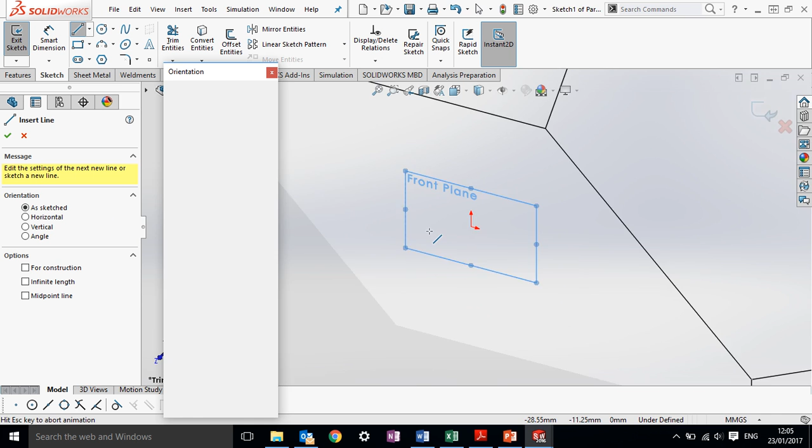So in this video we're going to build a metal frame for our brackets from previous videos and our box shelf to fit upon. So for more complex parts you can create a 3D sketch, but for what we're doing today a 2D sketch will suffice. So I'm going to be drawing this on the front plane, and I am going to basically draw out the frame that I want.

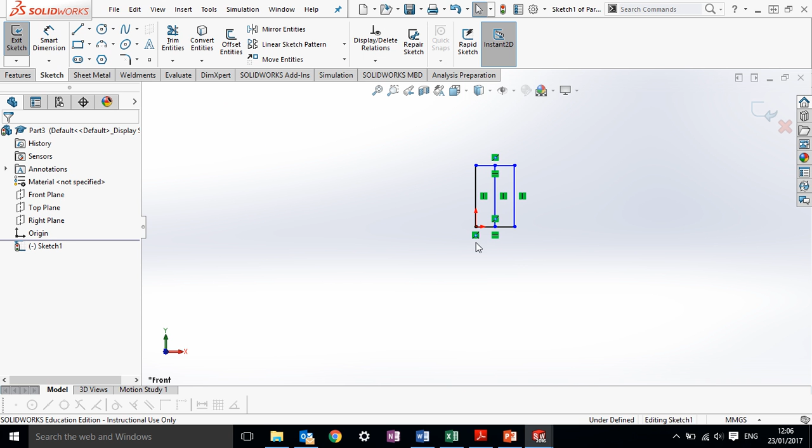It's important to remember that the center of this frame is what's important, or the center lines rather. So if I create maybe something a bit like this, and, sorry, that should be fine. Smart dimension. So the distance that I want between these would probably be about the 300 mark. That gives us enough room for the box shelf to fit on comfortably.

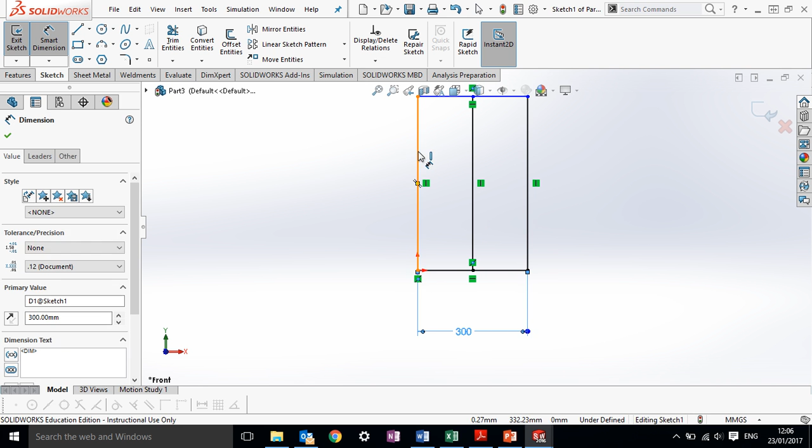So 300 millimeters, and this is right down the middle, so that automatically constrains. And the height doesn't matter too much. I'm going to set it to 500. Okay, so that's it. Get away. I don't care.

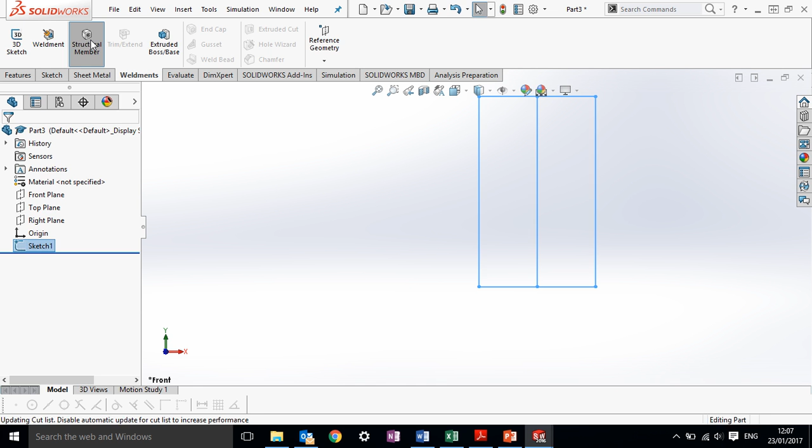Okay, so from there I can use the Weldments tab, if I press the blue arrow there, for a structural member. So I can then choose what type of material I want. So you've got inches and ISO. So inches is the material there is in stock of inches, and ISO is millimeters. So it's up to you which one you want to use there. Inches are still very much used in sheet metal and stock metal parts, so whichever you want to use.

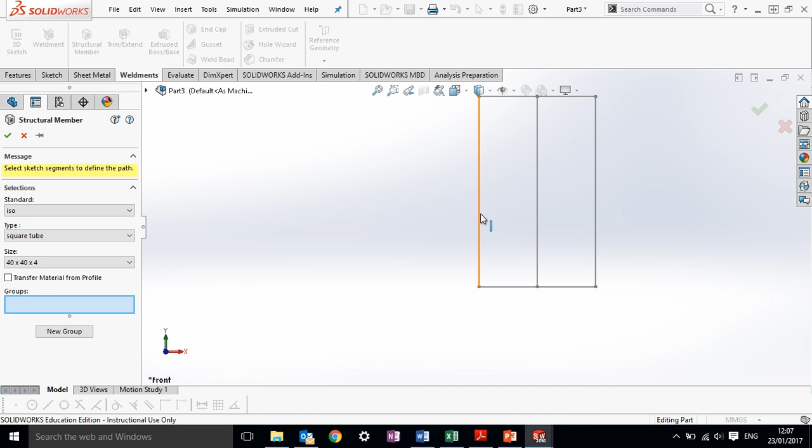The type that I'm going to use is a square tube, and the size is going to be 40 by 40 with a 4mm thickness, so it's going to be a hollow tube. And basically I select a group and I then select the lines going around. Takes a couple of seconds, and as I go around it will do this. Now I do this in kind of a circular motion going all the way around, and you'll notice that it miters the joints for you. It cuts them into 45 degrees.

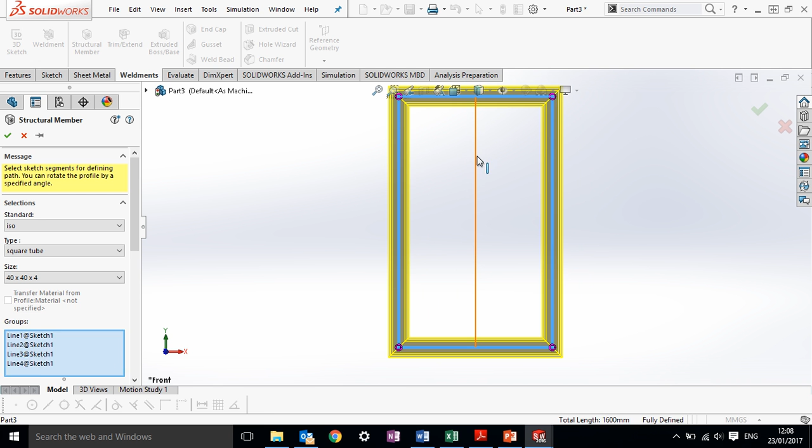No. And this one down the middle here as well. Okay, so it won't let me do that one down the middle. So if I need to do that one down the middle, I'll create a new group, set that one down the middle, and it will do that. Okay, done. I can then hide that sketch.

So that's just a very basic frame. I could, if I wanted, make that more complicated. I could make it a freestanding frame where I've got metal bars coming out here, but this is one that I'm just going to pretend is going to be mounted onto a wall or something like that. So from that we can continue to work.

So after that, that's more or less it. You can put on things like a weld bead there, but it doesn't show up too well on a basic laptop like mine, so I won't bother. So that's it. So you can save that as your metal frame. It's also very important to remember that getting that sketch correct is the most difficult part. After that you can do the rest of it fairly simplistically. Okay.